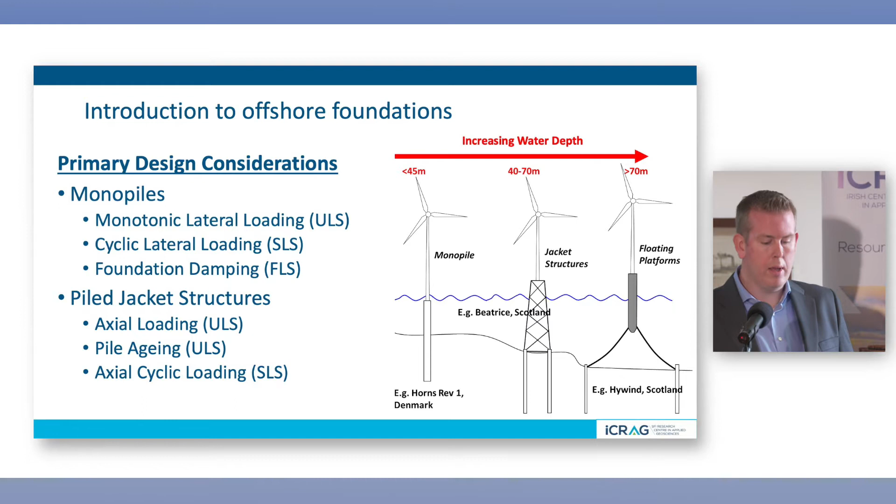There's some current projects I'm doing at the moment on cyclic loading and foundation damping as well, which will be very relevant for Irish offshore wind farms. And yeah, so I'll cover these projects. I've also a couple of ongoing projects on pile axial loading, pile aging, which could be very relevant for jacket structures, maybe in the south of the country if jacket piles are used.

So to look at the first project, this was a project started in 2013 called the PISA project, and it's, I suppose, one of the seminal projects in the geotechnical offshore wind industry. It was a project run by the UK Carbon Trust, and it was led by Dong Energy, who are now Ørsted, the largest developer of offshore wind in the world. And it included many of the main developers of offshore wind around Europe at the time.

So I was involved in the academic work group, which included Oxford, Imperial College and University College Dublin, where I was at the time. The project had a £3.5 million budget and ran over 3 years. And the aim of the project was really to develop new methods that could be used in industry, so engineers would use these new methods to design monopiles, and it's been very successful in that approach.

There's two main approaches used. One was a campaign of monopile field tests, which I'll show you now, and there was also 3D FE modelling, which was led by Imperial College. So just looking at the field tests, I was on site for about 6 months between these two sites in Dunkirk and Cowden, where we ran a comprehensive suite of lateral loaded field tests on monopiles.

So the figure here in the middle is probably very small to see, but essentially this is the setup we had. For each pile test, we typically monitored about 75 instruments continuously. For the large pile tests that we did, we monitored about 150 instruments, measuring everything from the above ground response to novel fibre optic sensors to measure the strains in the piles as they were being loaded. And from this, we were able to derive the response of the piles below ground.

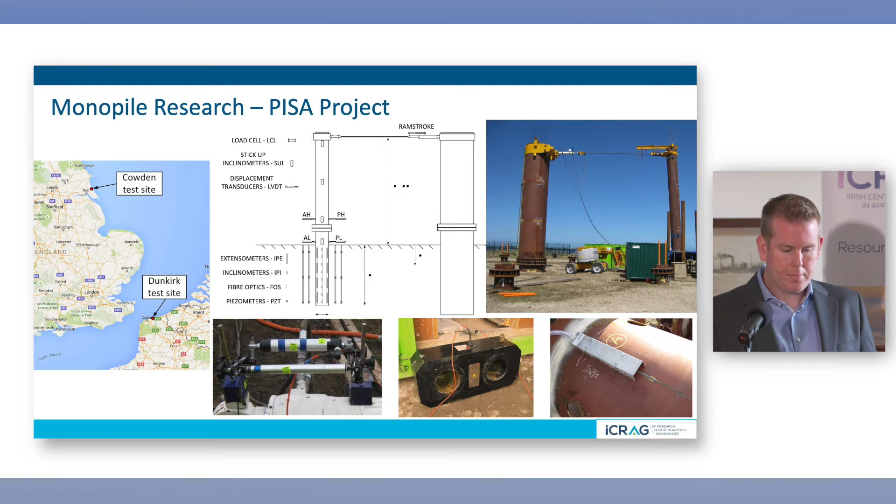So these pictures here, the top one is the large pile tests at Cowden. So these are 2 metre diameter piles that were loaded against each other laterally to failure. And the picture in the bottom left there is from Dunkirk. The Cowden site is a stiff glacial till site, which might be relevant for some of the Irish Sea stuff. And we also have a dense sand site, which is also relevant for much of what we see in the Irish Sea.

The picture on the right here just shows the monopile foundation response from the field tests. So we've got the horizontal load, so the load that's being applied to pull these piles over, on the y-axis, and on the x-axis we just have the displacement of the pile. The black line you see there is the field test results that we measured. The dashed line just underneath it is the 3D FE model that was run by Imperial College, so quite a good prediction of the response from the 3D FE model.

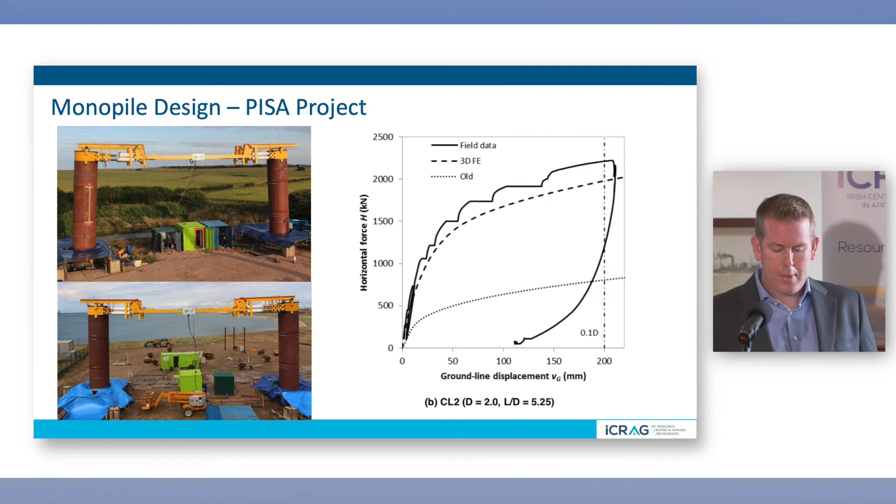And the dotted line along the bottom is the actual industry standard approach at that time. So this is the American Petroleum Institute method that was used to design piles up until this project came about. So you can see the standard method, the old method, the dotted line there, under-predicted the stiffness and the overall strength of the foundation by a factor of 2. It was very conservative, adopted from the oil and gas industry directly. So the aim of this project was to develop new methods which would be much better at predicting the response.

Essentially what it involves is doing 3D modelling of your monopile. You can then extract what are called soil reaction curves. These are essentially nonlinear springs. You can just extract them from the 3D model, and you apply them in a simpler beam spring model. So the 3D is very time consuming to do. If you're doing an offshore wind farm design, you might need to run tens of thousands of analysis cases. It's not realistic to do these entirely in 3D.

So as I mentioned, this project was very successful. We published the papers in Géotechnique at the end of 2020. There was a special issue of Géotechnique, which is the world's premier journal in geotechnical engineering. It's the first time there's been a special issue in this journal for about 30 years, so it was quite a big deal. And as I mentioned, it's now the de facto design method that's used for monopile design.

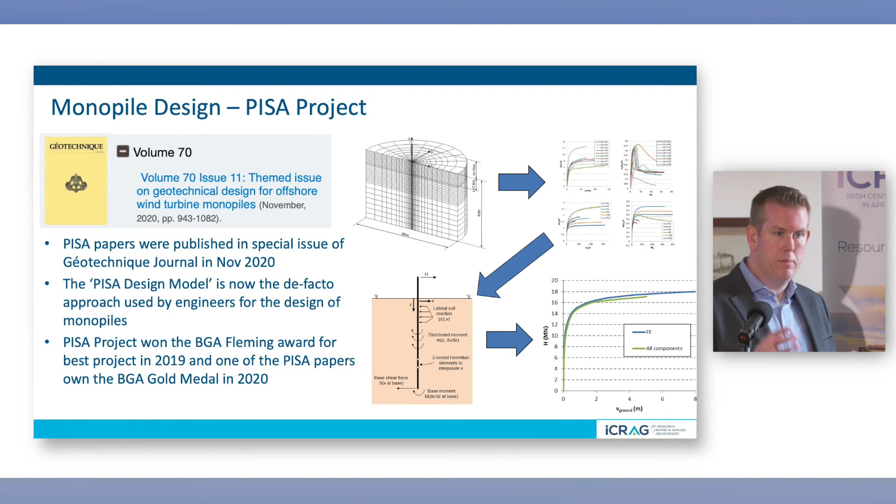And it won several awards, including the British Geotechnical Association's prestigious Fleming Award for Best Project in 2019. And one of the papers from the PISA project won the gold medal for Best Paper in 2020. So a hugely successful project, and it really shows what happens when industry and researchers collaborate. There's huge benefits for everyone to be gained.

So looking at some current research that I'm doing at the moment, this is a SEAI funded study, so the Sustainable Energy Authority of Ireland. I'm leading a project on developing damping parameters for Irish offshore wind farms. So this essentially involves doing some cyclic laboratory triaxial testing on soil samples, where we measure the damping in the soil at different strain rates, at different strain levels, and then we're testing a range of soils which are relevant to the Irish offshore wind sector.

So we're keen to work with developers here. If you have any soil samples from a particular site that you want to have tested, please get in contact, and we would love to be able to test them and maybe include them as part of this project. Once these soil elements have been tested in the lab, we're going to use them to calibrate constitutive soil models, and we'll model full foundation response with these soil element tests.

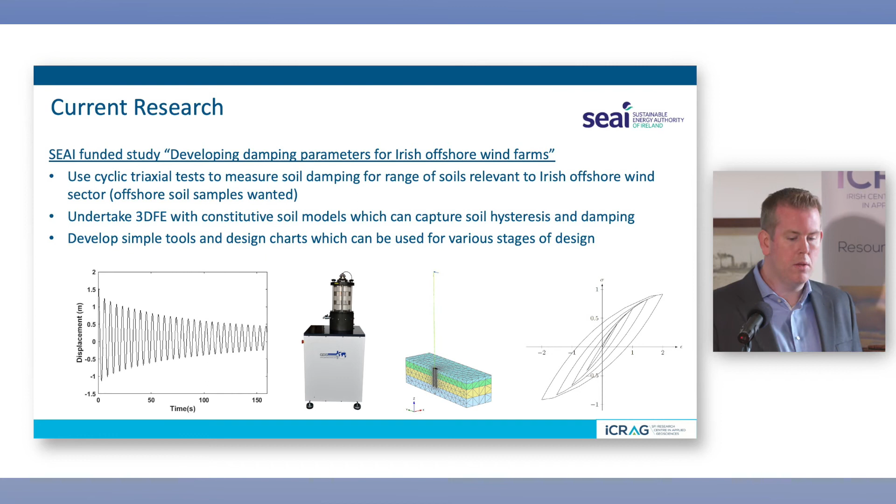So just quickly move on to another project. So this is an IRC, Irish Research Council funded study on cyclic design of monopile foundations. So while the PISA project dealt mainly with the monotonic response, so what is the maximum load you can apply to a foundation before it collapses, cyclic responses are also very important, as offshore loading, environmental loading, is cyclic in nature. So we need to understand how the pile accumulates strain over time, over 25 years, over its design life.

And at the moment, there's no industry standard way of accounting for this. So we're developing new methods in collaboration with GDG for doing these cyclic designs. So this is an ongoing area of research that lots of people are working on worldwide. And again, this will use 3D finite element models, some macro element models, and we're making some good progress on this. So the results from this should be published in the next 2 years or so.

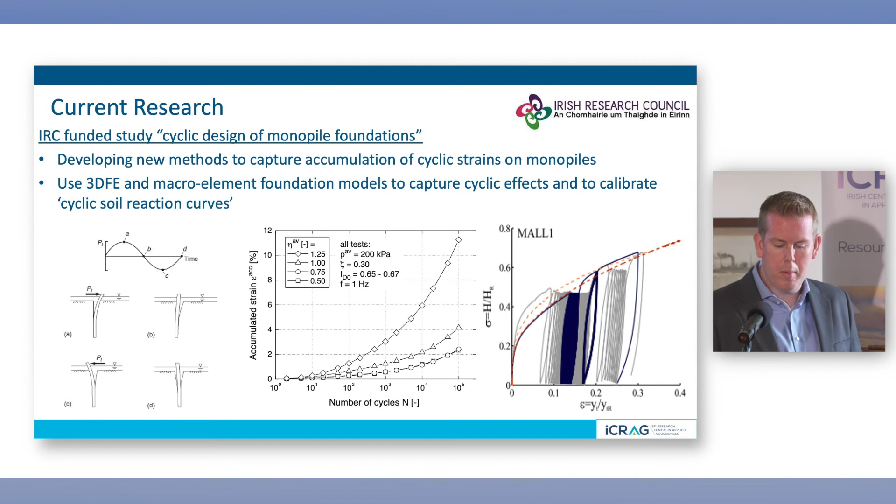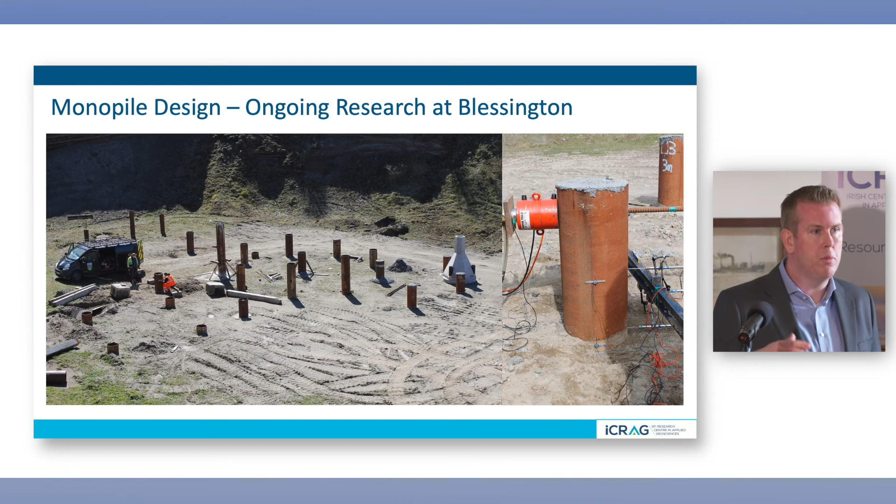We're also doing some ongoing research at Blessington, so plenty of pile tests. This is like a piling graveyard nearly in Blessington. This is one of our sites. We have 3 sites where we've done pile tests, and they're ongoing at the moment. We're driving more piles in the next 2 weeks there to continue this research. This is some lateral load tests that we did, kind of lower budget than the PISA project, but also very relevant, especially when we come to cyclic design.

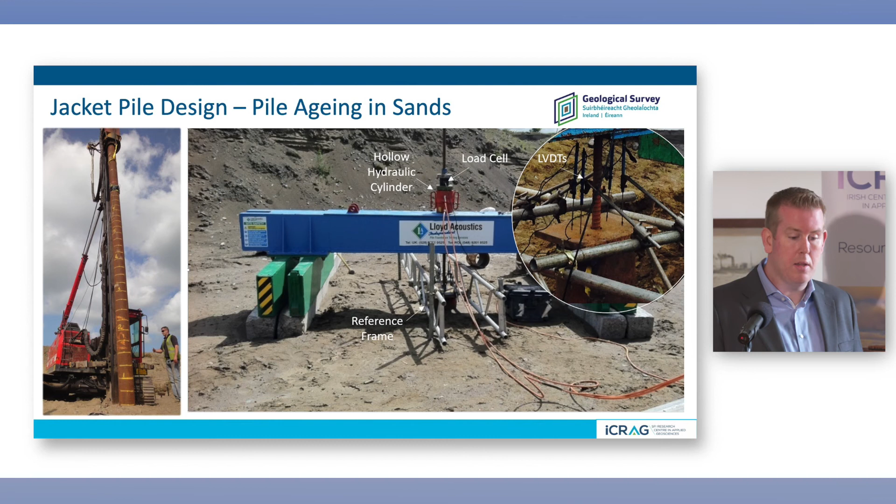We also have, I'm leading a pile aging study funded by the Geological Survey in Ireland, which is relevant for jacket piles. So jacket piles are much longer and more slender than a typical monopile, and they have been shown to experience aging. So when you leave them in the ground, the capacity of the pile increases significantly over time. So over the first 90 days the pile is in the ground, the capacity might increase by a factor of 2 to 3. And this has been measured at a number of sites, including our site in Blessington. So we're trying to better understand the mechanisms that are controlling this behaviour, so we can include it in design methods, so we can be less conservative in our designs.

And then finally, just to finish, this is Science Foundation Ireland and the Engineering and Physical Sciences Research Council, EPSRC. They funded a study called ROBOCONE, which I'm leading the Science Foundation Ireland part of. And this is to do with developing new in situ tools. So, as has been mentioned already, the cone penetration test is the most common tool used for offshore geotechnical investigation in situ. So this will involve developing new devices using advanced robotics, which can help create the next generation of investigation tools.

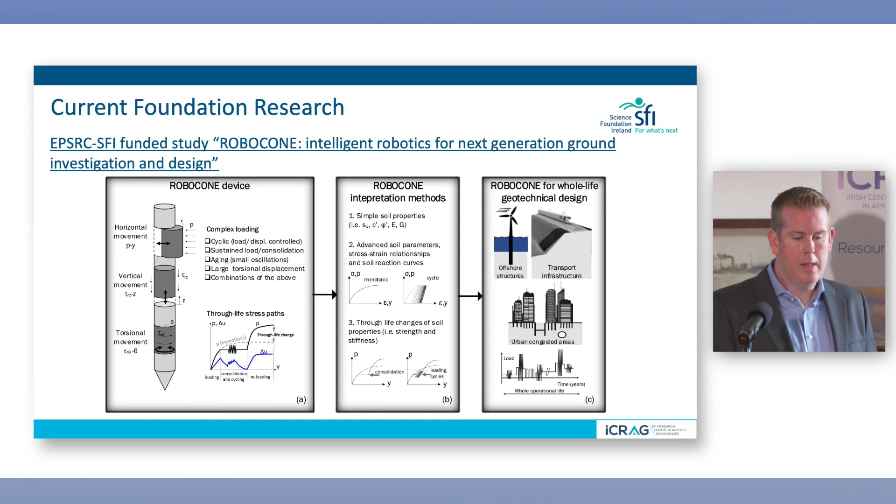So we'll have things like a p-y module, so a module which will laterally displace in the ground and undergo cyclic action, which can be representative for monopiles. And we're hoping this will be a very successful project and be used in the future for offshore design. So this is a project starting in June this year and will run for 3 years. So I'll keep you informed as to how the progress for this goes. But yeah, I can finish on this slide.

So just to acknowledge the various funding bodies, Science Foundation Ireland, SEAI, IRC, GSI, as well as a number of industry partners, Roadstone, Lloyd Acoustics, Toronto Piling and TerraDrive Piling. Just to mention that we're very keen to work with the offshore wind industry. If you have samples or if you have research that you want undertaken, please get in touch. All my research is applied. We want it to be used in industry and we want to use it to make offshore wind design more efficient. So yeah, please get in touch.

We're also trying to get accreditation for the lab in Trinity, so eventually that could be used for commercial testing. So if you're looking to do commercial testing for your offshore project in a few years' time, we should be in a position to be able to help you with that as well.